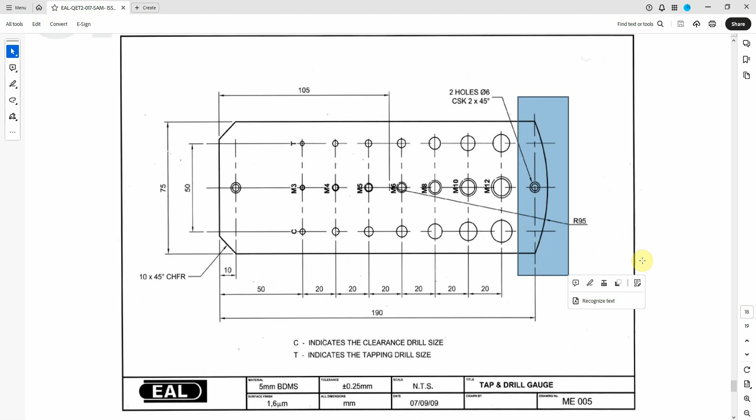Like any sort of technical drawing, it's just basically breaking it down into its individual shapes. So if you start from a set point, I'm going to start from this section up here, we have a rectangle base shape. You have a 10mm chamfer one side, 10mm chamfer up this side, and then at the end we have our 95 radius, which we'll then go through and add in.

But what I'm going to do is just draw our basic shape in Fusion first. So bottom to top 75, and then left to right we've got 190, and we need to add in the mass for this little radius base feature.

So going into Fusion on the default view, you can obviously start with a save and then save it into your workspace. It's always the preferred option, so you can use the recover feature rather than just leaving it as untitled.

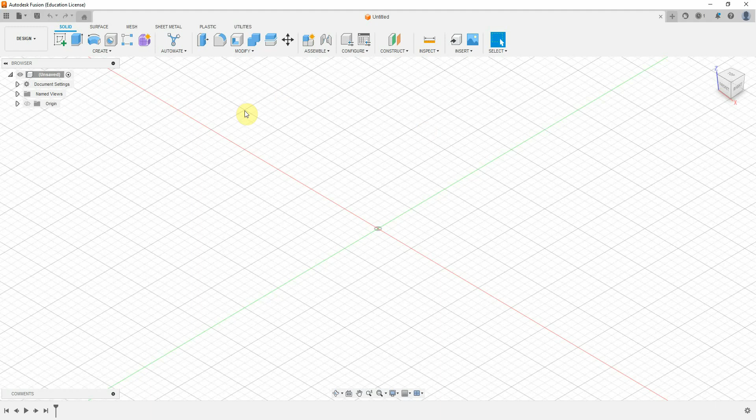So first off, I'm going to choose the top view because I'm going to draw this from the top down. I'm just going to slightly orientate my datum, so I can either hold down the middle mouse or use the pan button here and move it around. Get a sketch, click on the top.

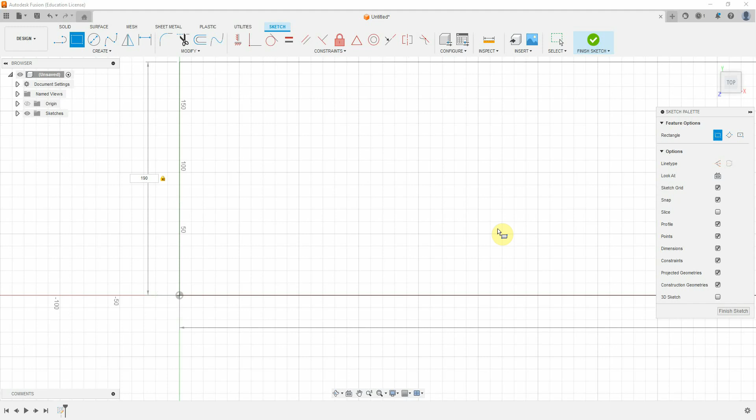Then what I'm going to do is create a rectangle that's going to be 190 by 75, so I'm going to tab across 190 and 75. That does seem very big - 75, 190. That's it, so make sure you got those dimensions. You can use the tab button on your keyboard to bounce between the two dimensions as well.

So you're probably thinking, well, okay, but I haven't added in here this little section because that's where the construction line sits down on the edge. So what I'm going to do now is put dimensions 105 in.

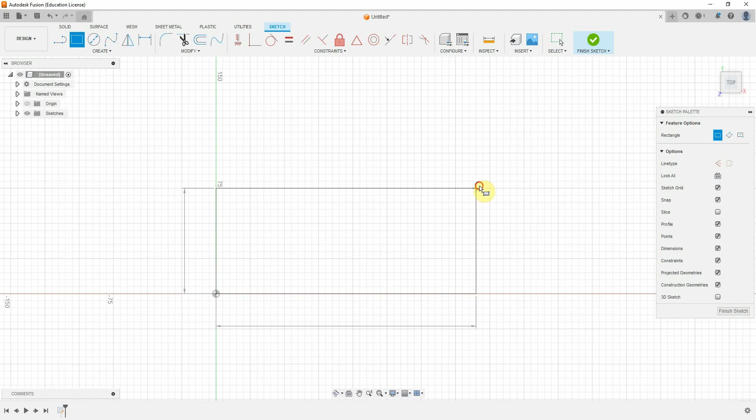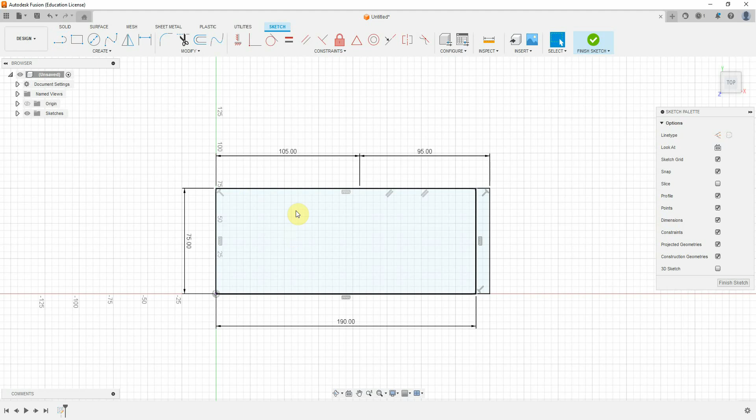So I'm going to select that and draw a line from the top, which is going to be 105 long, like so. I'm going to then draw another line, which is going to be 95, which will give me the end of that radius. And I'm going to draw a line down and close it off. So I've made two shapes - my inner rectangle, which is this side area, and then this little extra rectangle there, and this will become useful later. So that's my overall shape.

I'm going to finish my sketch either at the green tick or on the sketch palette here. Go to extrude, okay, go back to my drawing.

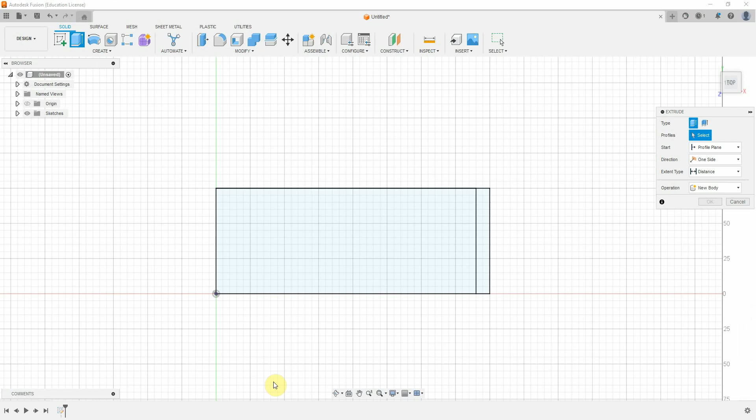I've got material which is 5mm thick, so I'm going to choose the first box, and remembering I need to choose the end box, so I'm going to put 5 in and 5 for that one. And that should then go as one big body, so I've chosen both front and back, but if I go to my sketch, I've still got that divide option, which I'm going to use later.

So that's kind of our stock material. Once it's cut to size, and if you imagine filing it all flat, would be what's left over.

So we've got our nice little grid which runs down the center of our part, which is 50 off of the center, so 25 either side, and then that runs basically all the way down till the end countersink. So it's kind of trying to now build a grid up, and how you do this is up to you. You could do it hole by hole, you could do feature by feature, but what I'm going to do is put a sketch grid on first.

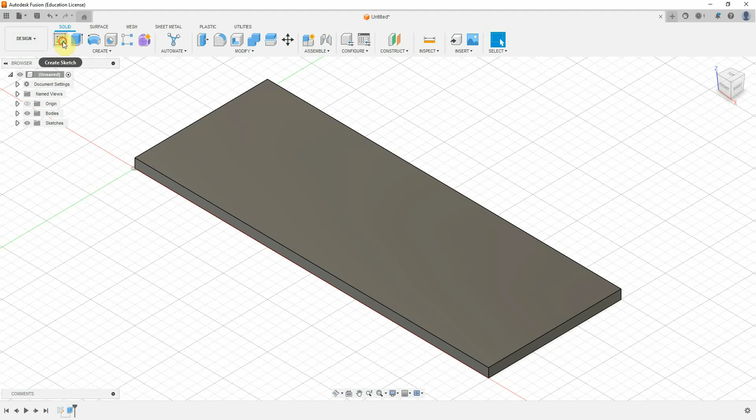So what I'm going to do is start a new sketch, draw the top of my face, and sketch exactly what was on my drawing. So I'm going to use a line, move to line type, put construction. We might want to put a center line first. Pick the center up with the triangle, so anything with a triangle with an X, that's the center point.

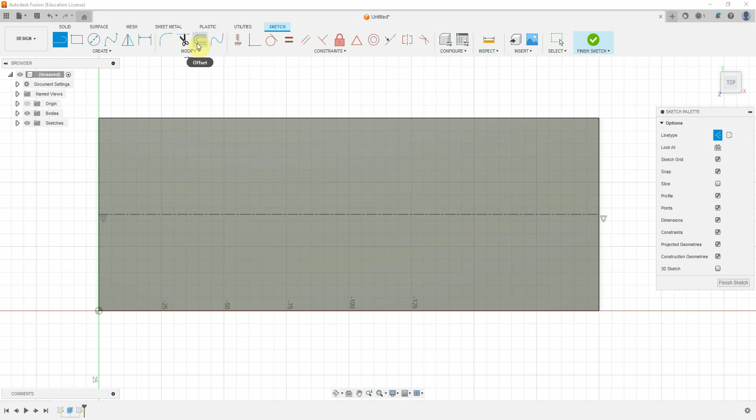To the center, and then I'm going to go to construction. And rather than try and work out what's 25, I'm going to use this little tool here - the offset tool. Click on my center line, and I'm going to want to come 25.

That's at 25 down, so that's going to be this bottom line here with all my clearance holes in. And I need to do the top line of my drill size before I do the tapping.

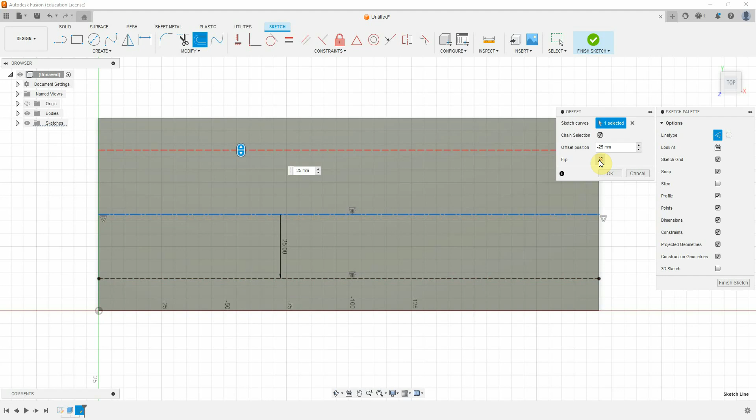So I'm going to do offset again, choose my line again. Remember, I'm still in the construction tool. Again, offset, either in the offset box or down where it's highlighted blue, 25. I'm going to flip it, or you could put minus 25. This is the top tapping edge. Middle section is my threaded section. Bottom section is my clearance.

So that's kind of all of the grids running horizontally across my page. Now I need to do the vertical drops.

So what we're going to do is start from working the vertical line. We're going to basically run off of this section here first, and then start to build the part along from left to right. So I'm going to start with the left edge, which is going to be this line here, again using the offset tool. So we're going to come in 10, so flip it.

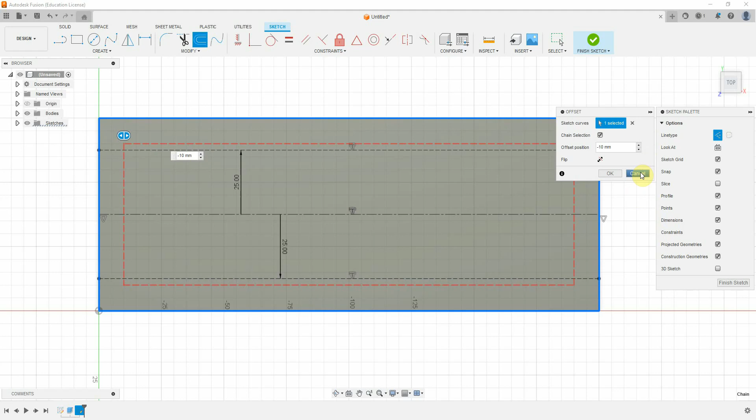Okay, now because I've chosen a rectangle, it'll pick up all of the rectangle lines. So what I'm actually going to do is convert this one here. Right click, and I'm going to base this line to run it down the edge. So it's got my little construction line in now.

Offset that one, and I'm going to come in minus 10 because I'm moving across the board. That's going to be my first one.

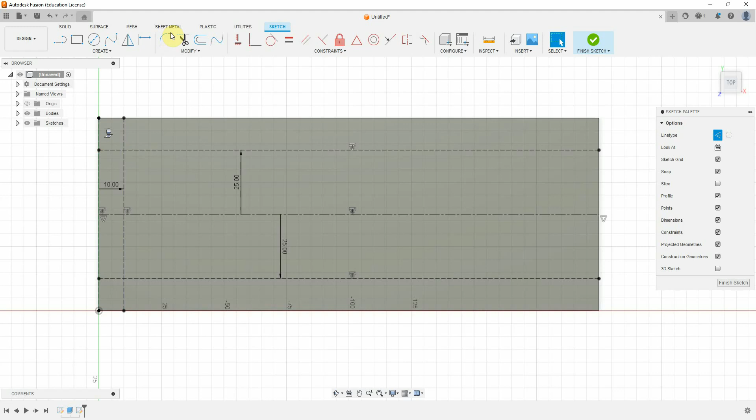Then after that one, we've got 50 from the same line, so don't get confused. Again, offset this initial line, minus 50 because I'm moving to the right. And then we're coming in 20 from that point onwards, so we're going to keep offsetting 20 every single time.

Okay, rather than using the offset tool, I'm going to use the pattern tool, so rectangular pattern, choosing my line. I need, so this is my first line, 1, 2, 3, 4, 5, 6 lines. I'm going to put 6 lines in. They've got to be 20 mil distance apart.

I need to do spacing, direction is across a line, distance 20 mil, like so. And I need quantity of 6, like that. So take that one off.

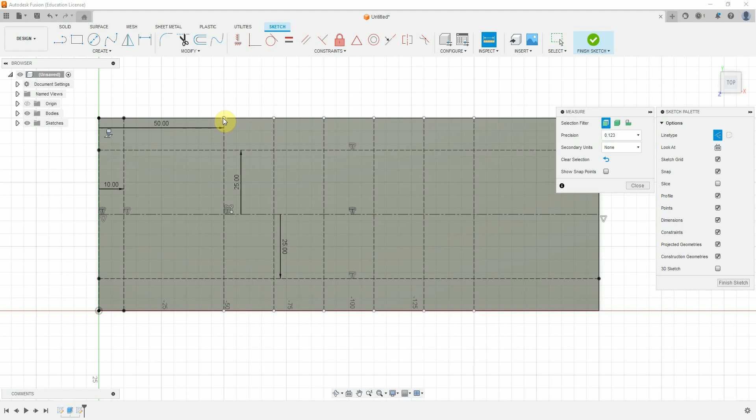Now if I inspect, it says 20 mil, 20 mil, to there should be 20 mil. So overall I should have from this point, 20, 40, 60, 80, 100, and 120.

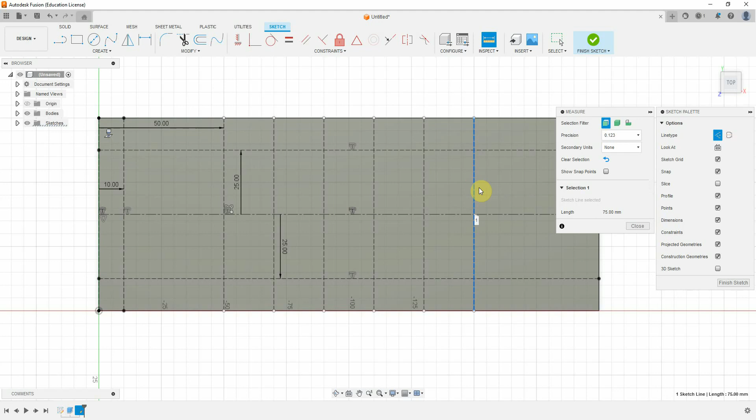So I'm going to go from this point here, so this point to this point. 100, so I need to add one more in to get back to my feature. Go off a measure, back to the feature.

So I should offset the last one, minus 20. And check again that it is there to there, is 120, which it is. Get that one.

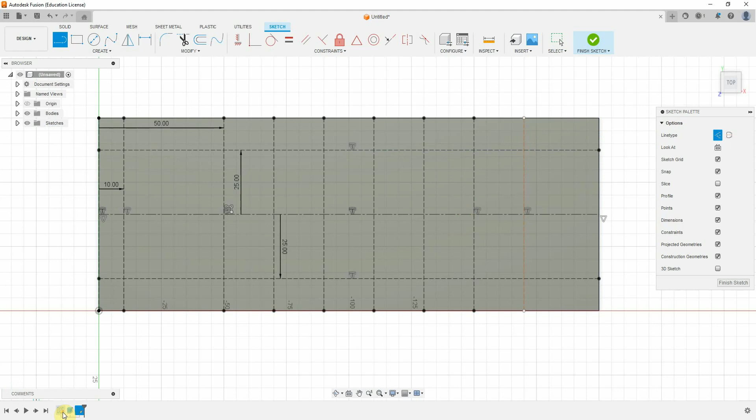So I'm going to draw a line. I should be able to pick that line up, which is there. So draw a line, and what I'm going to do is reference that 190 mil away from this corner edge, like so. And then I'm just going to change that again to a construction line, like so. So that's going to be my sketch.

Now what I'm going to do is put a placeholder pin, so a point for all of these elements. So what I'm going to do here is go to point, and put a point every place where I need to put a hole. It's going to be a bit of a clicking exercise. You can use the pattern feature like I did before.

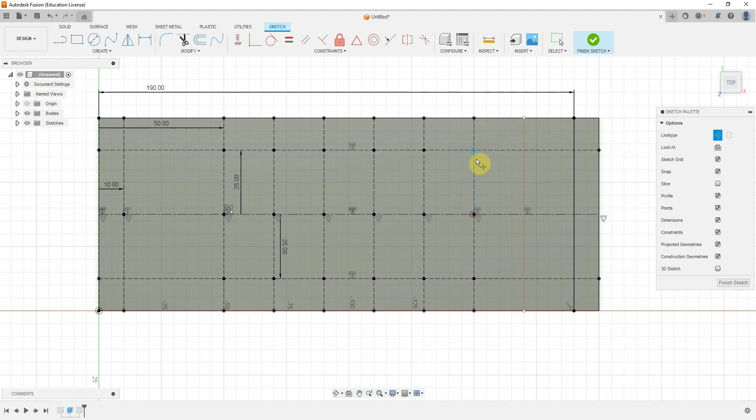Just take your time, don't rush. And the last hole on that one. Basically I'm going to use this as my working sketch. I'm going to finish a sketch, and now you can see I've got loads of little pinholes and points to play from.

So the next stage, people will start to draw circles and run through using these individual pinpoints. However, it starts to get slightly tedious putting circles and using the extrude and cutting them through, so what I'm going to do is use a hole tool.

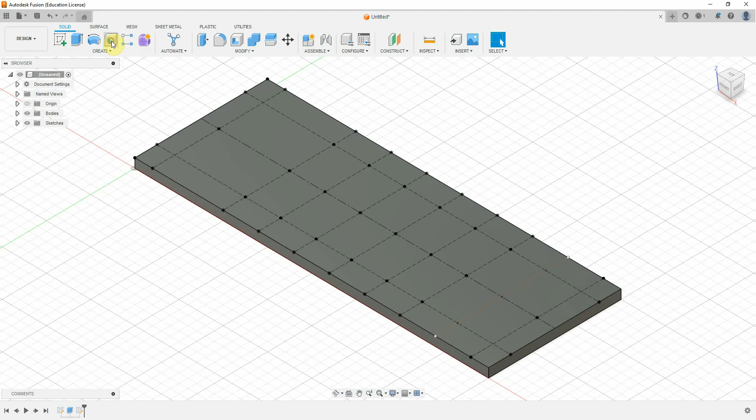I'm going to choose my top face, all the way around to the top. I'm going to choose my first hole, so choose a reference and choose my first point, which is up here. I'm also going to choose my second point. I'll stick with the top, and you might be able to do 1 and 2 because they're the same hole.

So these are the two lots of countersink holes. They're 6 mil diameter, so we're going to come through and choose a countersink. We're going to come down and choose the depth, which is going to go through all, the distance through all. Then change the diameter, we're going to choose 6 mil.

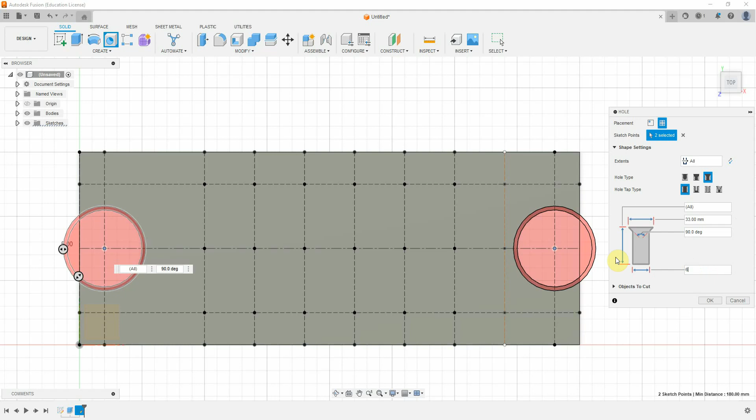And then the outer countersink - again it doesn't actually give you a size, it just says 2 times 45, so we're going to put an extra 2 mil. So we're going to change it to 8 mil, like so, and then we're going to tick those ones off. So that's giving us our first 2 holes, and it's giving us a hole feature down here.

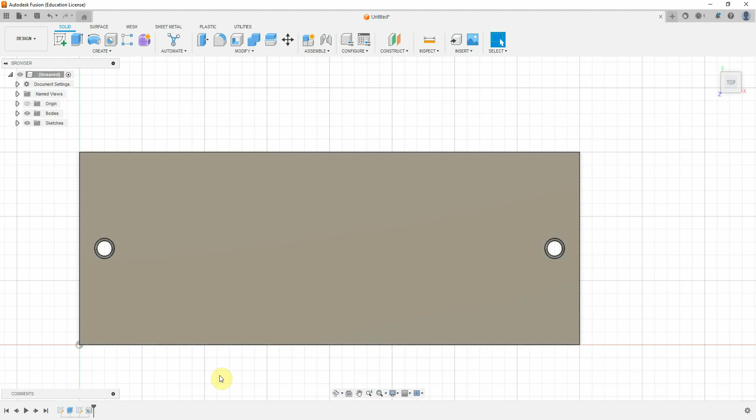Using the same approach again, selecting the face. Because this is obviously using our reference grid, you might want to make sure that's visible, so you can come to sketches and turn the sketch on just here. You can also turn the sketch on for that other line if you need to.

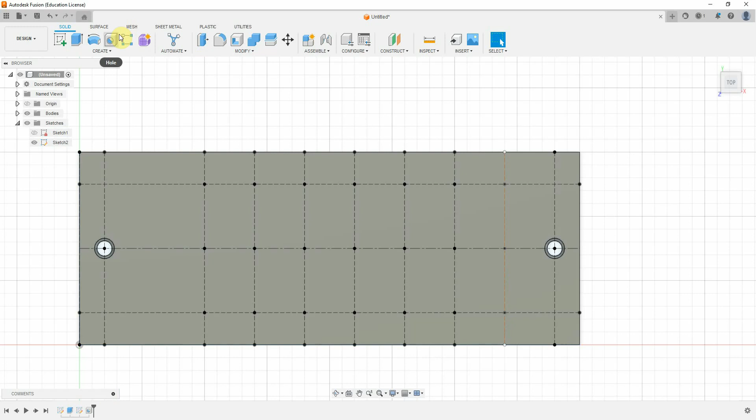Back in the hole feature, and I'm just going to work the taps. So the first one I'm going to choose is the tapped hole in the middle, distance through all. Tapped is this one here. Come down to my profile - I think it's an M3 to start off with. Yeah, M3, it's a 3 mil hole.

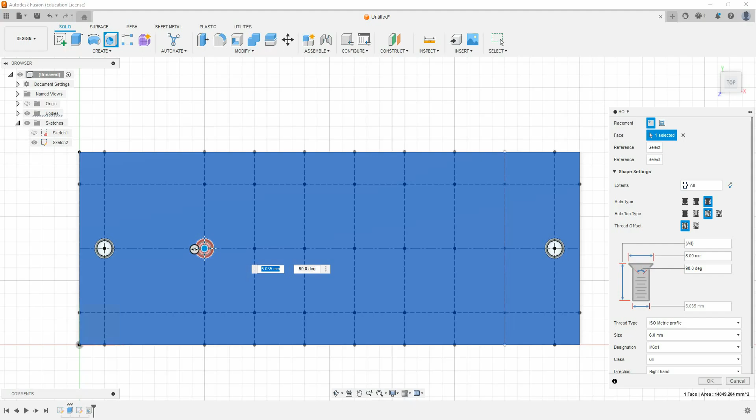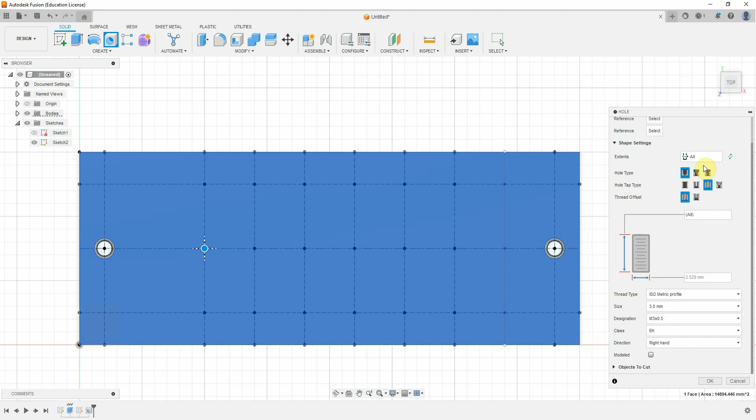You can obviously model it if you want, or you can leave it as blank, but I'm basically going to put that on M3. It's going to be a simple hole - I believe there's no countersink, it's just a straight hole, M3. So I'll work at my profile, all those bits. Okay, there's my M3 hole.

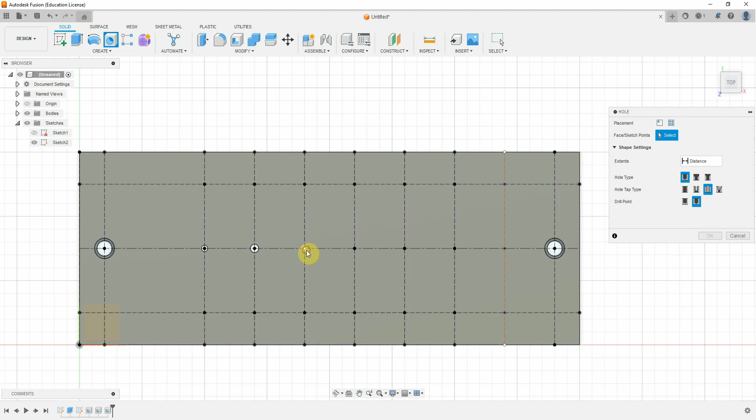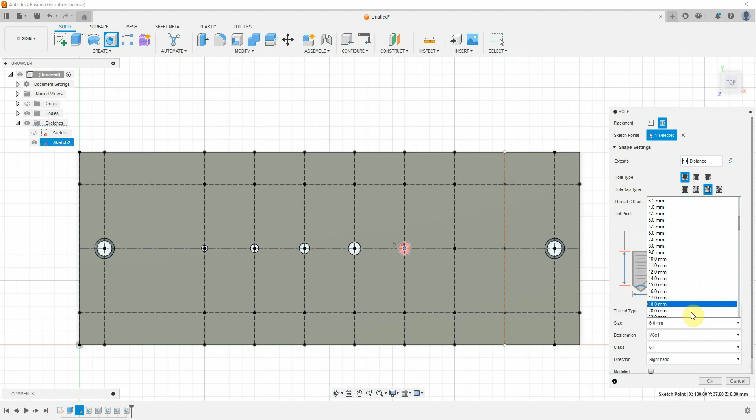Next hole on the next point, it's going to be a 4. So same again, tapped, simple tap, 4 mil. Okay, the hole this time is 5 mil, so 5 mil. Next one, it's going to be an M6. This time it's going to be an M8. And then 10 and 12 - so 10, and the last one, 12.

Okay, so that's all my holes in. Next side, then we're going to do the bottom run. So again, it's the same - pick up hole, this time I'm going to go to clearance, so my clearance hole. You've got a simple clearance or tapped clearance. Choose my fit - so this one's going to be a type of profile, so we're just going to say it's a bolt.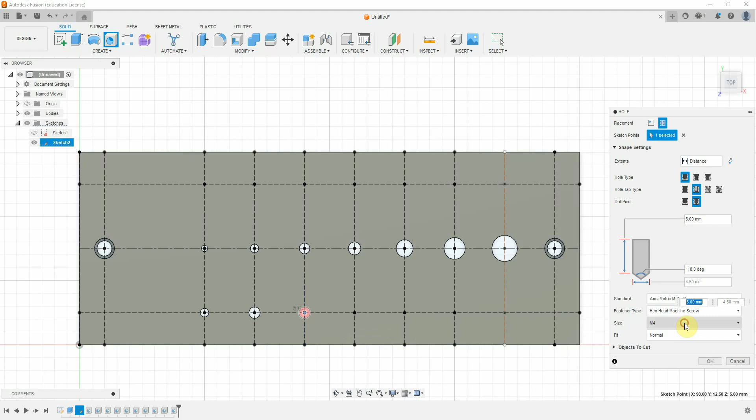You might not get all of them, so I have to go for an M3. I was using a normal fit, so that'll get the size for you. This one is an M4. So again, M4. This one's going to be an M5. This one is an M6.

This one is an M8. This one is an M10. And I'll take the last one - this one is an M12. So using the system to work it out.

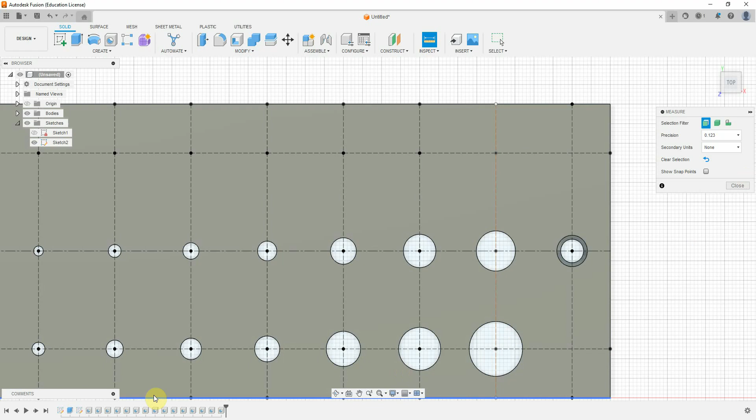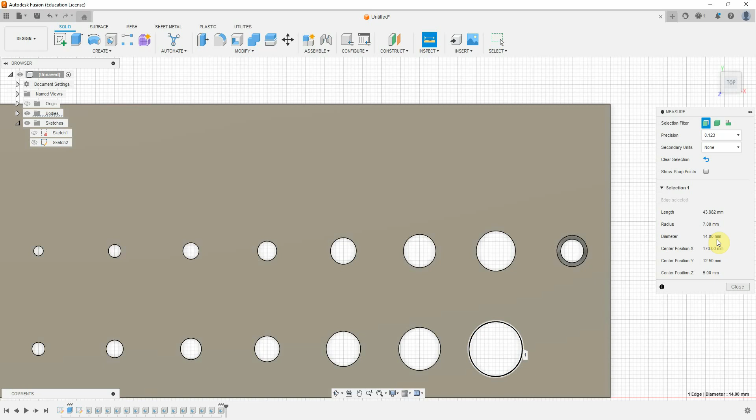And go to that one, measure and inspect. This one, we know that here is going to be a 14, so we know it's going to clear then - a 12 by 1.75, just roughly over 2, and the fitment there is correct.

And then we're going to have to, unfortunately, there's no database on the system because it doesn't know what drill size that you use. So what we're going to do is manually put this in down the bottom - so 2.5 for an M3.

Same again, and this time it's going to be 3.3 or 3.5 probably for an M4. This one is our M5, which would be 4.2 or 4.5 if you round it up. This one, which is M6, which is going to be 5 mil. And this one, which is our M8, will be a 6.8 because there's 1, 2, 5.

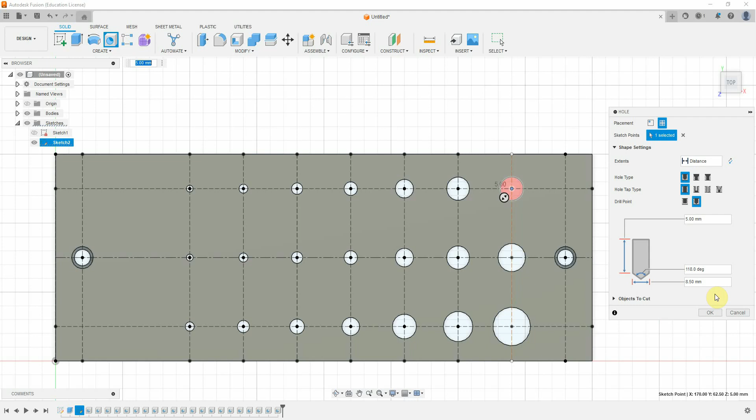This one, which will be our 10, is going to be 8.5, 8.5. And then the last one, which is our 12, is going to be 10.2, like so. So there's all my holes and features on. I can turn my sketch off now.

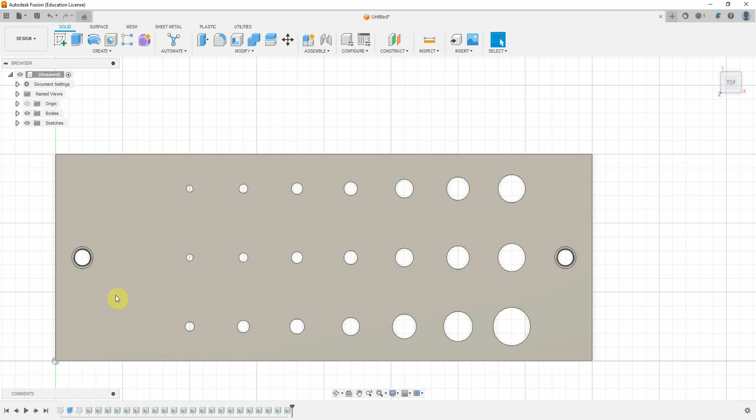So that's my drill and tap gauge. Now it's just going to be working on the features. Obviously got the radius dimension and the chamfers dimension. I'm going to do the easy bit first, so I'm going to pan around and orientate slightly so I can get to both sides using the orbit function.

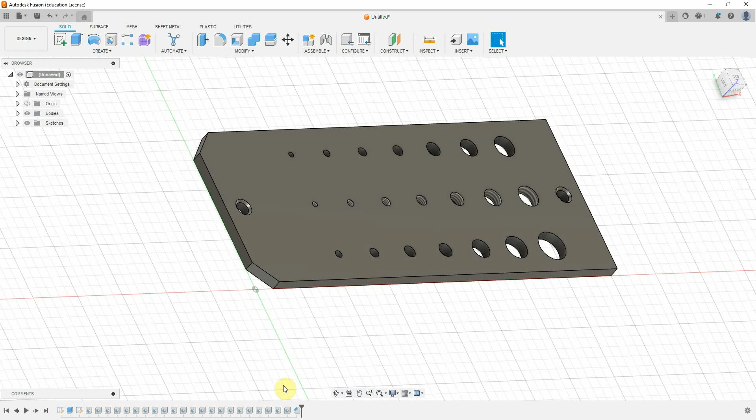Chamfer lives under the modify, so you want to click that one and that one. We want equal distance, and we know it's going to be 10 mil. So I'll chamfer those down, gives you a nice feature, 10, and then we're going to do the same again.

Okay, you're going to cut that round on a fillet. So we do both of them, and we want that 95. Now it's going to come up with an error, which is why I said this is slightly important later, because everyone will try and work out the fillet.

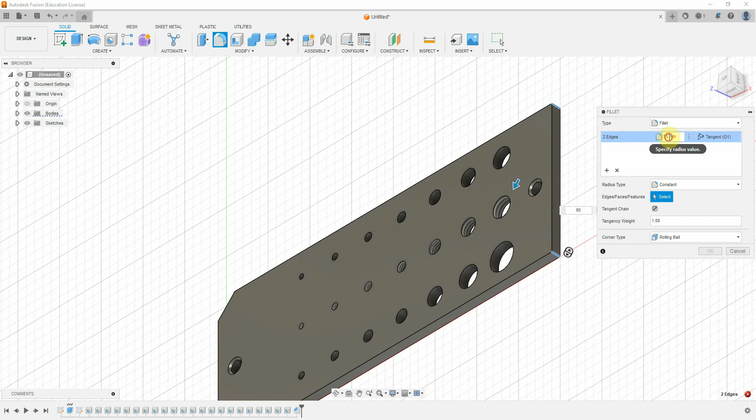So what you have to do is half the 95 to do either side, so that's going to be 47 and a half. It's very bizarre why it's just done that. You can use the roll feature, so you put in a specified radius.

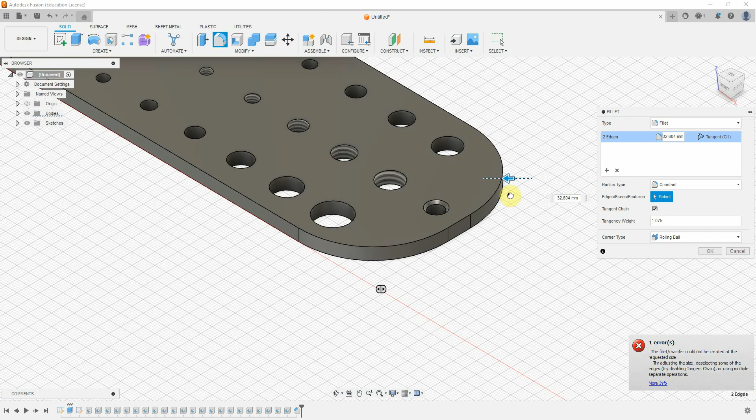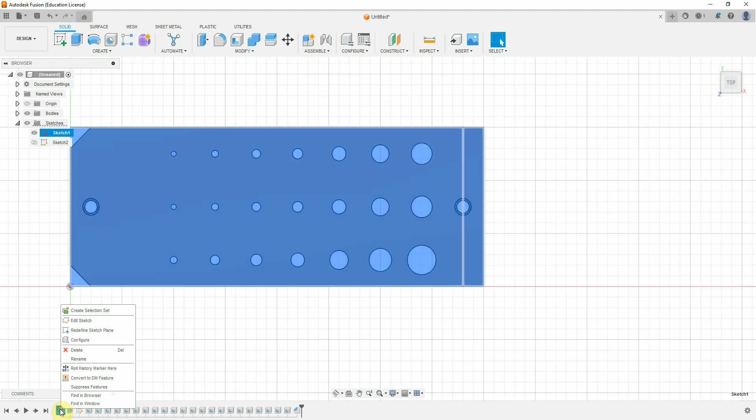Okay, this is not going to let you do that. So this is where the feature will come in from earlier, which is why I put the line in. If we go to our sketches, we turn on sketch number 1 on the top feature. What we can do is edit that sketch again, and find the midpoint.

So what we're going to do is find the midpoint. I'm just going to chuck a line in, and then change that to a construction line. Just going back to the basics. I can then put a circle on the midpoint, so another construction line, drop this one down, like so, put a circle on.

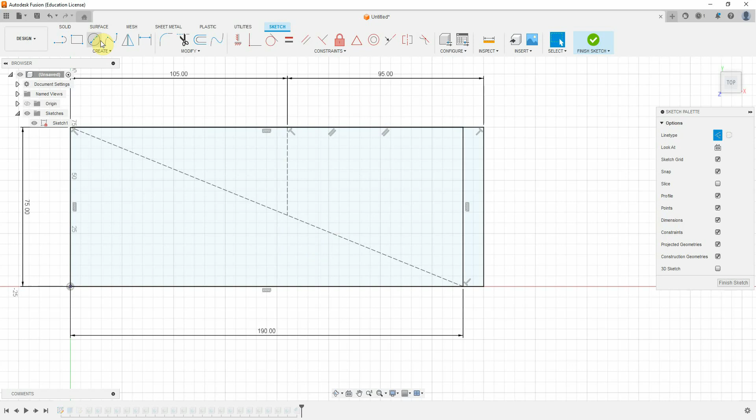Bring it out, so it's going to be my element. I'm going to go trim, just get rid of that side, this side, that side. That's going to be my cut. Change that back to a line, and all I'm going to do is finish that sketch.

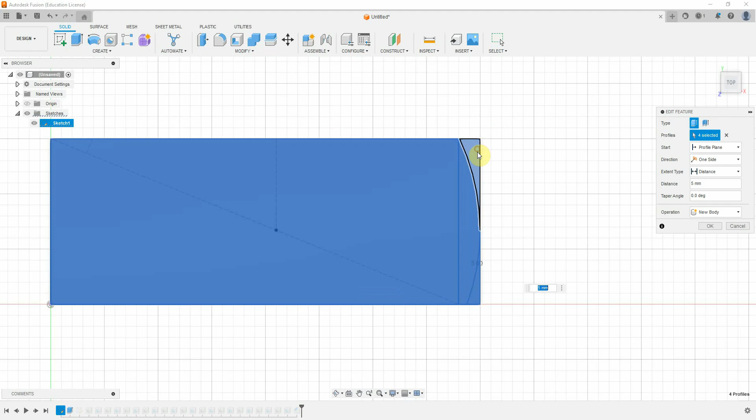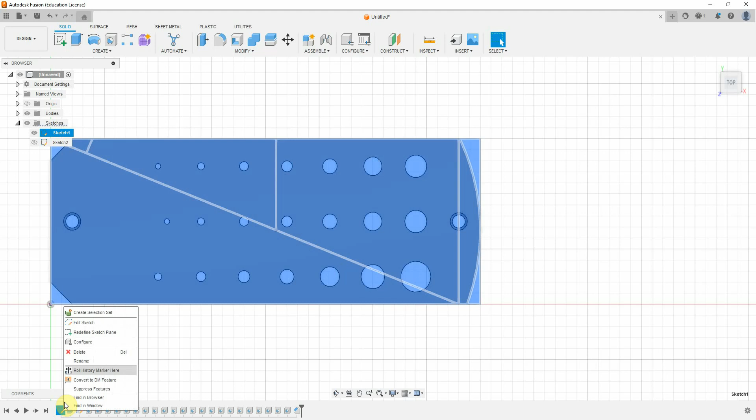Go back in, modify that one. I'm going to deselect those two features. Let me turn off my sketch, and then there's the features added on. Just quickly looking at that, it hasn't quite hit that side, so maybe you have to edit that again, maybe that point was slightly lower.

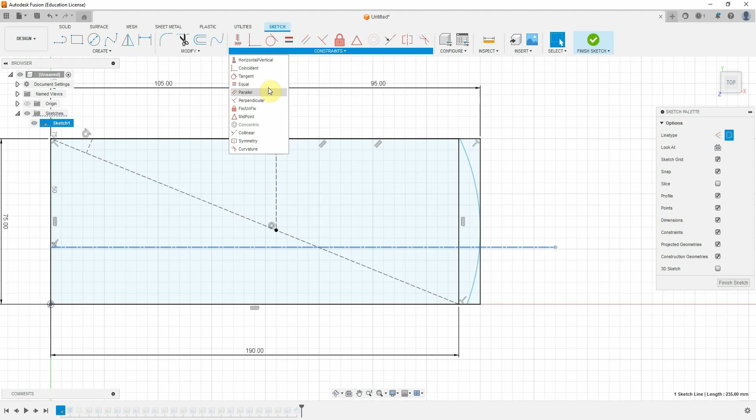Change that to a center line. Normally dimension this, so we'll get half of 75. Bit strange why it's picking that up as a diameter. Okay, we can constrain it to the midpoint. Very odd. Yeah, it keeps picking that up as that.

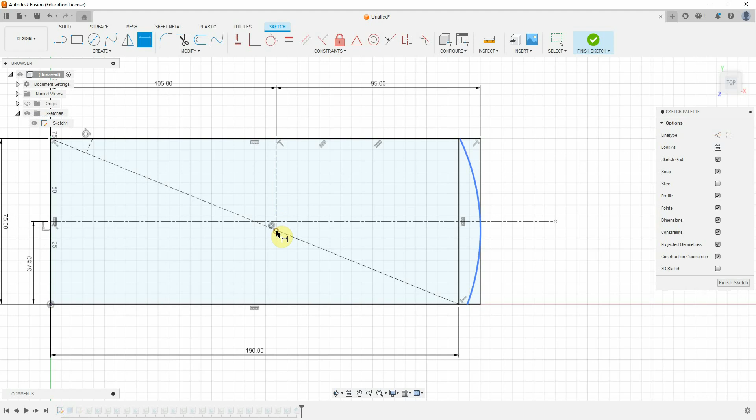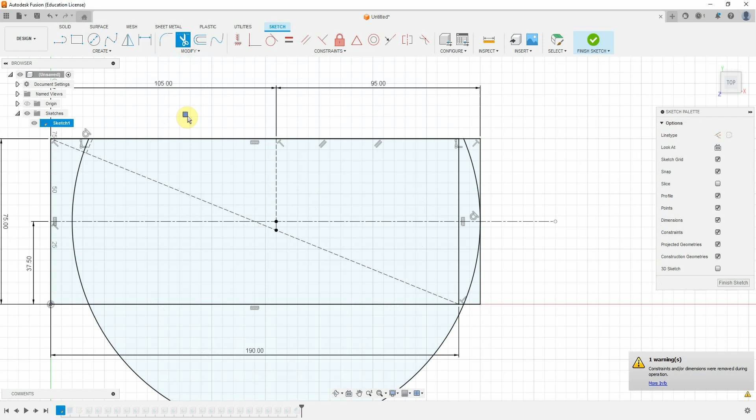So pick up that line, find the midpoint, and then you can obviously move it. Move it off, re-put the line back on. That's better. Again, same process as before, just trim it all down, like so, finish that bit. It was going to go a bit strange on the feature, so re-plug that side back in. There we have it.

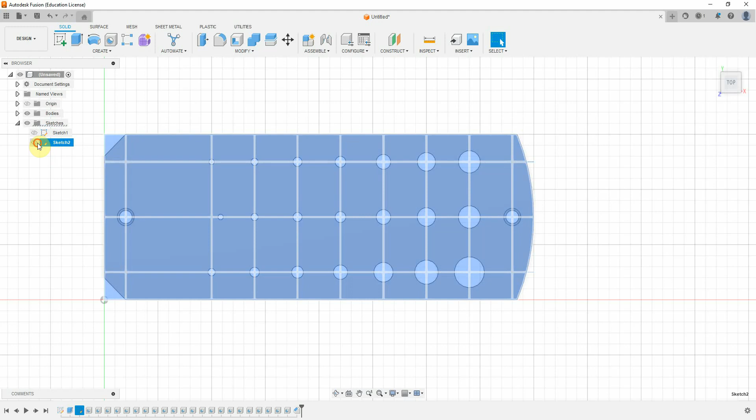There's our overall shape. So if we hopefully inspect that, it should say it's a radius of 95, which is correct. So just make sure everything's lined up. For some strange reason, that one there has moved, so edit that feature. This is why I do them as holes. So re-put the reference as the point. Okay, so all my holes are lined up.

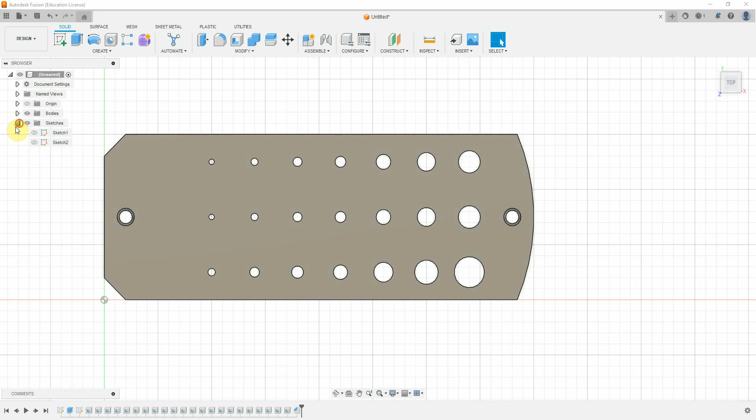You could then, if you want to, put some text in and go from there. But there we go, close that down. And there's my tap and drill plate, all nicely modelled, which then you can obviously go away and make it as you see fit.